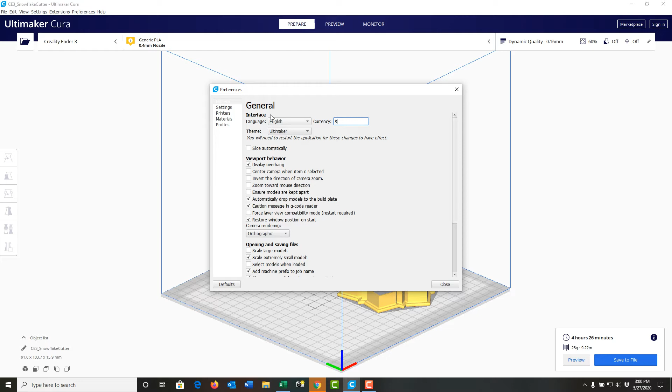I'm going to go to materials next. So here it's picked the generic PLA because that's what I told it I have. And then over here I can set the cost. The diameter of my filament is 1.75 millimeters.

And I'm going to put in my total cost. So my cost for this roll was $31.58, and that was for 1,000 grams. Now that I've added the cost, you'll notice here it's updated the cost of my part.

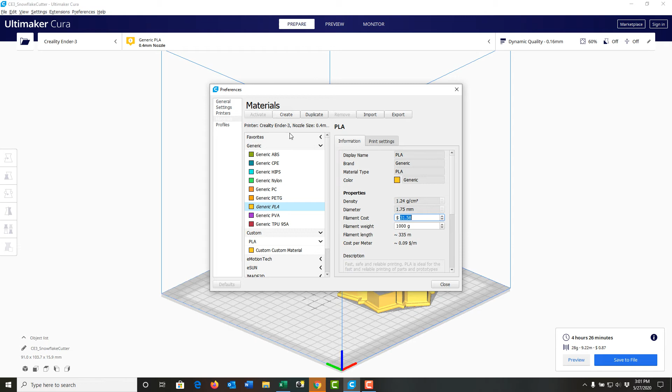These are all the settings we want to look at for now, so I'm going to close this. And next I want to preview the part. So my 87-cent part, we use 28 grams of material, and here I am in the preview.

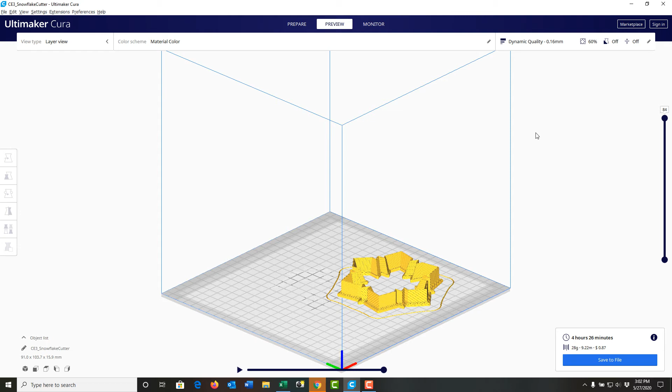This outline shows all the material plus this little outline. So I'm going to just go back to the Prepare tab for a minute, and I'll expand this. And what we're seeing is the skirt.

So if I change this to a brim, tell it to reslice it. This time I'll go back to the preview. Here we can see the effect the brim has.

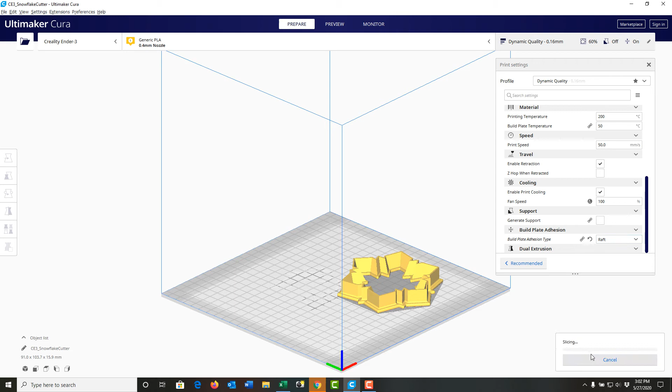Again, I'm going to go back to Prepare, change the adhesion type to raft, reslice my model. And if I preview it, we can see the difference. So the raft will print a thin layer across the whole thing, which can be broken off later.

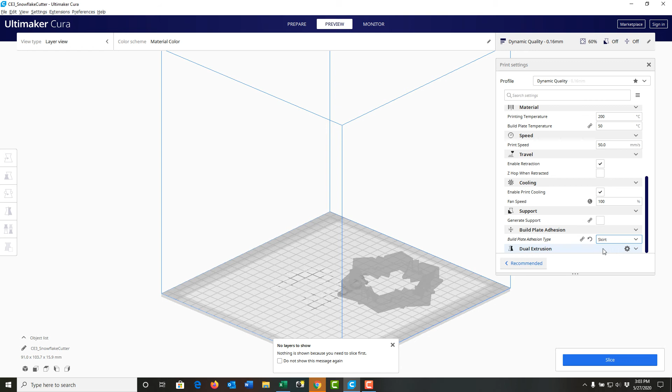I find as long as I use a glue stick that the skirt works fine or none. So I've switched back to skirt. I'm going to reslice the part.

So I've stayed in the preview, and down here I can play the preview, and we can see the extruder head moving along for this layer. I'm just going to pause that.

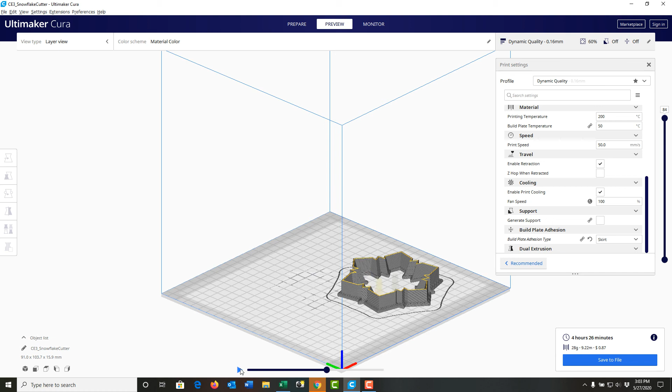And I'm going to come up here and I'm going to minimize my settings. And here I can scroll through the various layers to see the part being built. Because I told it no support, it won't have any support.

If I stop at any point and look at the top view, we can get a sense of the infill pattern. And again, I can play this for any layer. I'll switch back to the isometric view, and I'll pause it there.

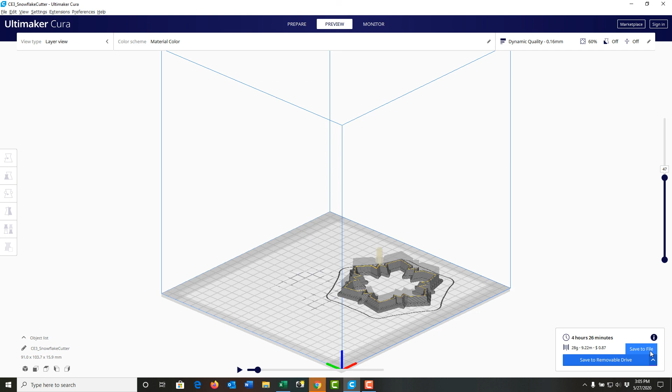Once I'm happy with the preview, I have two options. I can save it to a file, or if I plugged in the memory stick that came with the printer, I can save it right to the memory stick with this here.